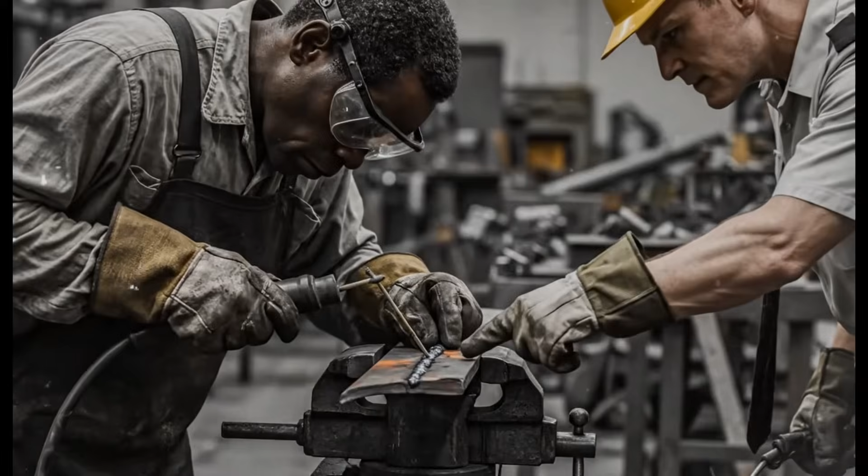The year was 1940. Europe was aflame, liberty teetering on the brink, and America stood at a crossroads, desperately unprepared for the storm gathering on the horizon.

Into this palpable tension stepped William S. Knudsen, a 61-year-old Danish immigrant who had forged his legend from bicycle mechanic to the very pinnacle of American industry, the president of General Motors. He strode into a Pentagon conference room, a civilian amidst a sea of starched uniforms, facing a table of seasoned Army generals who frankly thought he'd lost his mind.

Their faces were etched with skepticism, one even daring a laugh as Knudsen unveiled a promise that sounded like pure fantasy. He would build tanks the same way Detroit built Chevrolets. Not hundreds a year as America's meager 331-unit production in 1940 suggested, but thousands per month, a torrent of armor rolling off assembly lines, run by civilians who'd never even smelled gunpowder. The generals scoffed, clinging to their outdated notion of craftsmanship, of tanks painstakingly forged one by one like medieval swords.

But Knudsen wasn't bluffing. For three decades he had mastered the Ford production philosophy, understanding that complexity shattered into simple, repeatable steps yielded industrial miracles. A tank wasn't some mystical weapon. It was steel, rivets, and engine tracks. If America could churn out 15,000 cars a day, it could build 500 tanks. The math was brutally simple. The execution would be hell on earth.

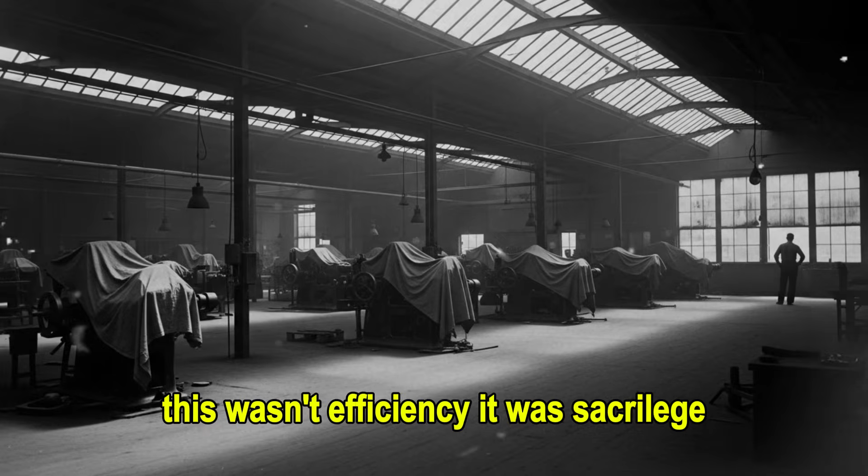The Army's Ordnance Department, steeped in tradition, recoiled. This wasn't efficiency, it was sacrilege. They saw the automotive industry's arrogance as an insult to their decades of meticulous custom manufacturing.

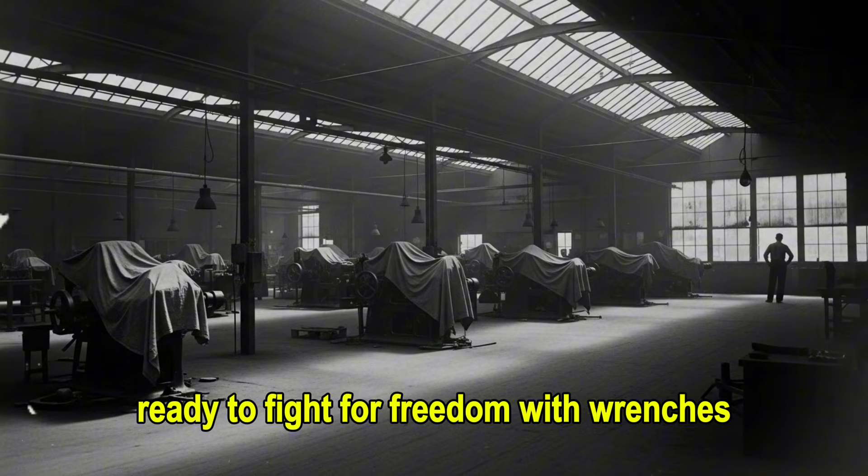Yet Knudsen had heard it all before, back when Henry Ford's assembly lines were deemed barbarism. Now, with the fate of nations hanging by a thread, he was betting America's very survival on that same ruthless industrial logic. He'd already crunched the numbers: millions of square feet of idle factory space, countless unemployed workers ready to fight for freedom with wrenches instead of rifles. The only missing pieces were permission and a tank design simple enough to be mass-produced.

When the British M3 medium tank specifications landed in July 1940, demanding a mere 1,000 units, Knudsen saw his destiny. He quietly instructed his engineers to prepare for 10,000. The stage was set, the impossible dream ignited.

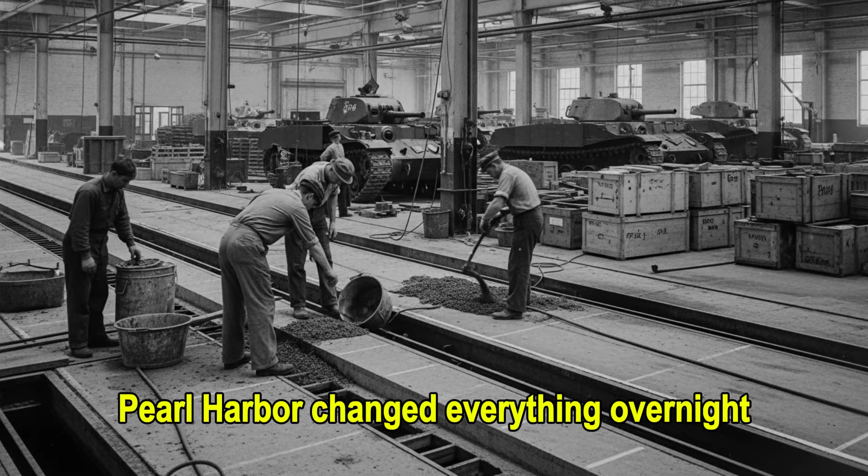On December 8, 1941, Knudsen's theoretical production plans became America's only lifeline. The phone lines at the War Production Board burned hot as factory managers across Michigan, Ohio, and Pennsylvania received identical orders: stop making whatever you're making and start building tanks.

Now the Cadillac plant in Detroit that had been stamping luxury car fenders was suddenly expected to forge tank turrets. Fisher Body, famous for sleek automobile curves, got blueprints for armored hulls. Nobody had done this before. There was no manual titled 'How to Convert Your Buick Factory into an Armory in Three Weeks.' They were inventing the process.

While German panzers rolled across North Africa and Soviet T-34s burned in Ukrainian fields, the chaos at the Chrysler tank arsenal in Warren, Michigan during January 1942 looked less like precision manufacturing and more like controlled panic.

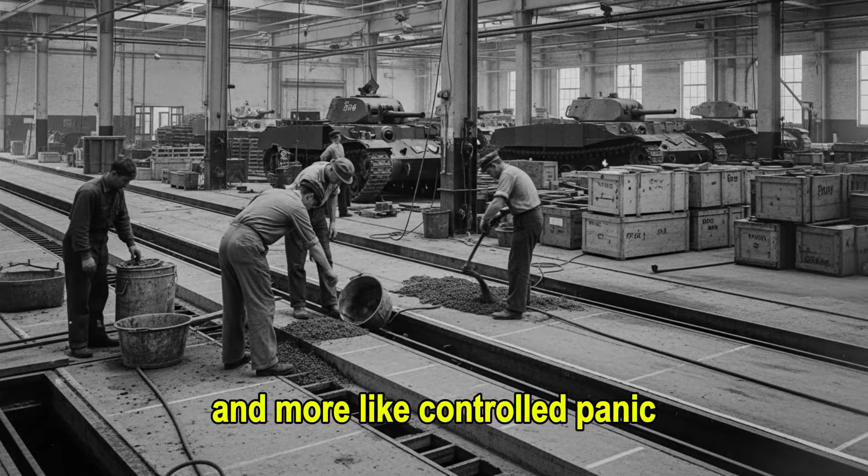Workers showed up to buildings where concrete was still curing on the factory floor. The assembly line existed only as chalk marks on bare ground. Crates of tank components arrived before anyone knew where to store them, so they piled up in parking lots under tarps. Forklifts navigated between construction crews still installing overhead cranes.

The first M3 Lee medium tanks assembled there in April 1942 were basically hand-built, taking two weeks per vehicle, slower than the craftsman approach Knudsen had promised to replace. Engineers stood on the factory floor, literally rewriting blueprints in real time as they discovered tolerances that worked in prototypes failed at scale. Training became the nightmare nobody had anticipated.

You could retool a building in months. But how do you transform a laid-off restaurant cook into someone who could weld armor plate that had to stop armor-piercing rounds?

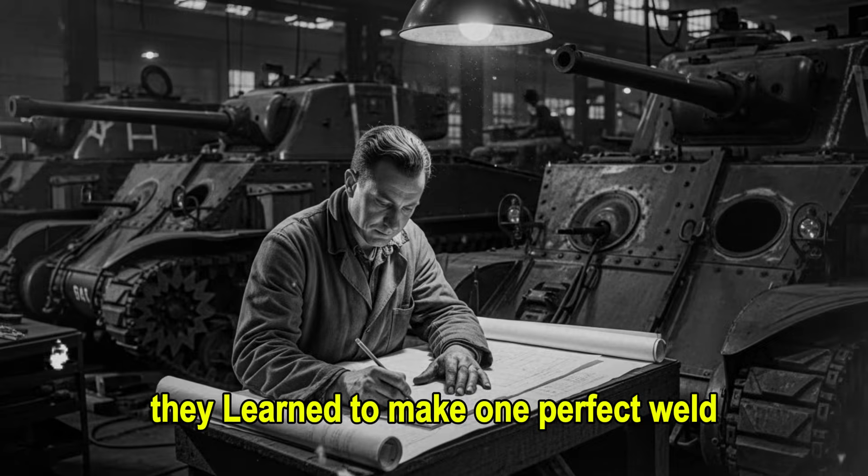The traditional approach of apprenticeships lasting years was impossible. Knudsen's training director, a former Ford efficiency expert named Carl Bailey, created a radical solution. They broke welding into exactly 17 specific techniques needed for tank production. Nothing more. A recruit didn't learn to be a master welder.

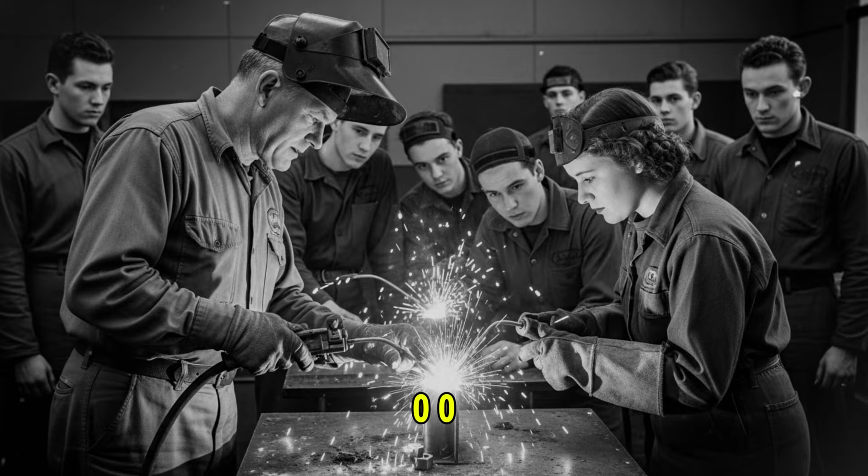They learned to make one perfect weld in one specific location over and over, 10 hours a day. It was the assembly line philosophy applied to human beings. Critics called it dehumanizing. Bailey called it the only way to build 1,000 tanks a month with workers who'd never

held a welding torch 3 weeks earlier. The material bottlenecks nearly strangled production before it started. Armor plate was the critical constraint. Only a handful of American steel mills had the rolling capacity to produce the thick, hardened steel required for tank hulls, and they were already backlogged supplying shipyards.

In February 1942, Knudsen personally visited Bethlehem Steel's plant in Pennsylvania and made an offer the CEO couldn't refuse: government financing for a new plate mill that would triple their output, but only if they delivered the first run to Detroit within 90 days. They did it in 87.

Meanwhile, the shortage forced engineers to get creative. The M3's riveted construction, which traditionalists had insisted on, became a liability. Rivets took time and required pre-drilled holes with precision tolerances. Welding was faster, but required higher skill. The compromise: teach welding faster, simplify the joint designs, and accept a 15% reject rate that quality control would catch.

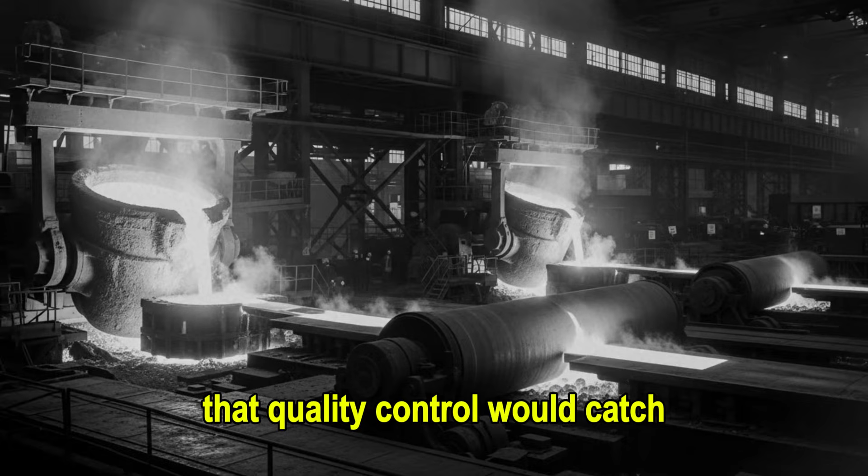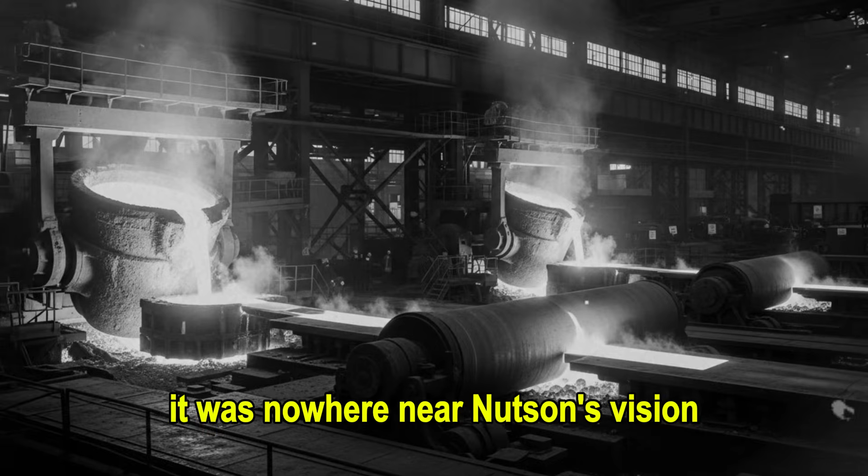By March 1942, the Chrysler line finally started hitting rhythm, producing 4 M3 Lees per day. It was nowhere near Knudsen's vision, but it was movement. Then the Army changed everything again. They wanted the new M4 Sherman instead, a better design, but completely different production requirements.

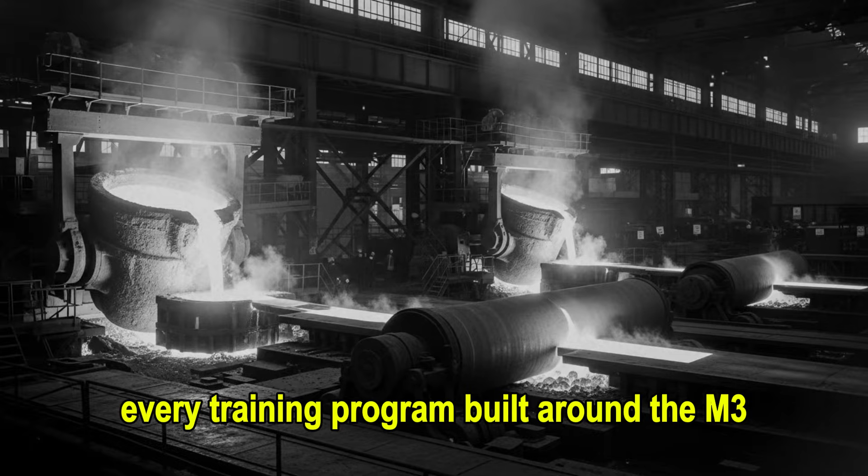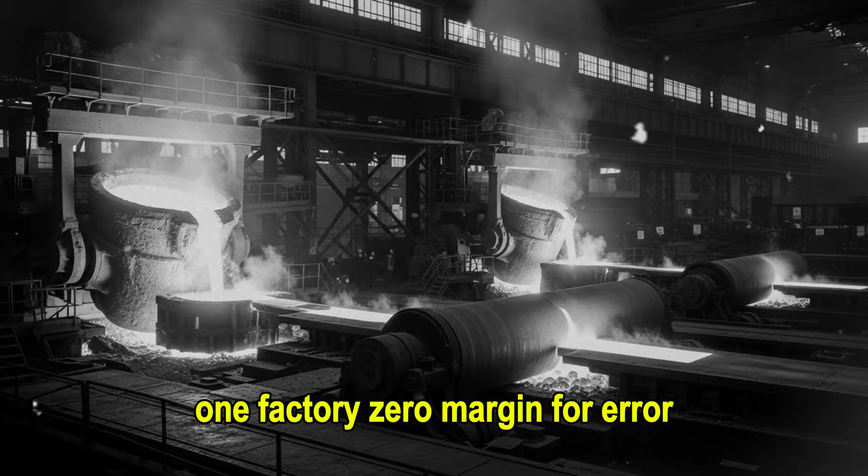Every jig, every tool, every training program built around the M3 became instantly obsolete. Knudsen didn't flinch. He'd been expecting this. War doesn't wait for perfect conditions. You adapt or you lose. The retooling began immediately, even as M3s were still rolling off the line. Two assembly lines, two tank types, one factory, zero margin for error. Welcome to industrial warfare, American style.

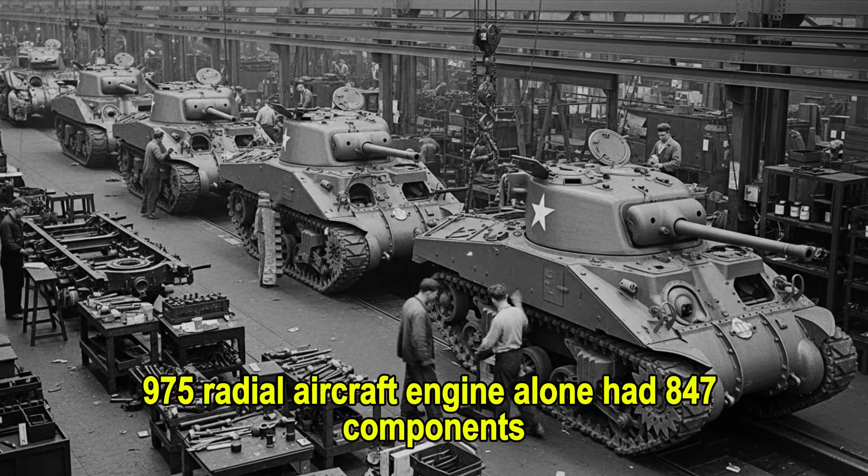The M4 Sherman that arrived on blueprint paper in August 1941 was a 30-ton mechanical nightmare for mass production. It contained roughly 8,000 individual parts, not counting the 5,000 rivets some variants used. The Wright R-975 radial aircraft engine alone had 847 components. The transmission required 23 precision gears machined to tolerances of one thousandth of an inch. The vertical volute suspension system used 48 bogie wheels per tank, each needing individual rubber cushioning.

Army Ordnance had designed it for battlefield superiority, not factory efficiency. Knudsen's engineers took one look at the specs and knew their job was surgical: dissect this beast, simplify everything possible, and make it so straightforward that someone's grandmother could assemble a section without screwing it up.

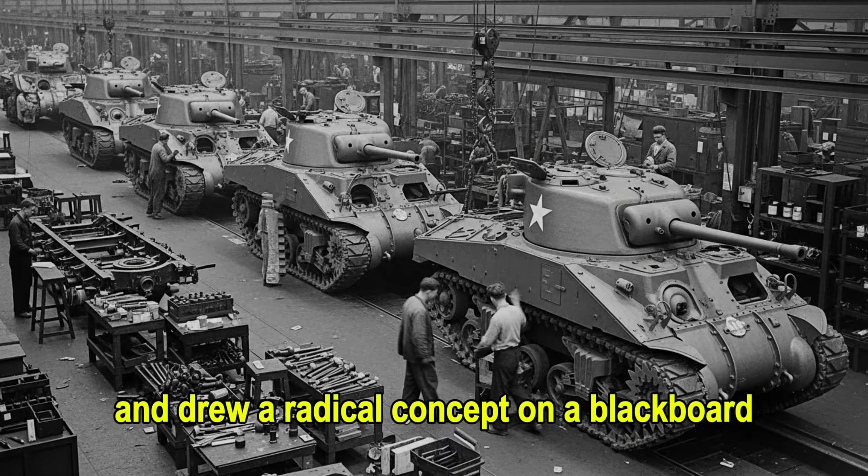The breakthrough came from a GM engineer named John Whittley, who'd spent 20 years designing Cadillac transmissions. He gathered the team in September 1941 and drew a radical concept on a blackboard: treat the Sherman not as one integrated machine, but as 7 major sub-assemblies that could be built simultaneously in different locations, then married together in final assembly—hull, turret, engine, transmission, suspension, electrical, armament. Each sub-assembly would have its own dedicated line feeding into the main artery.

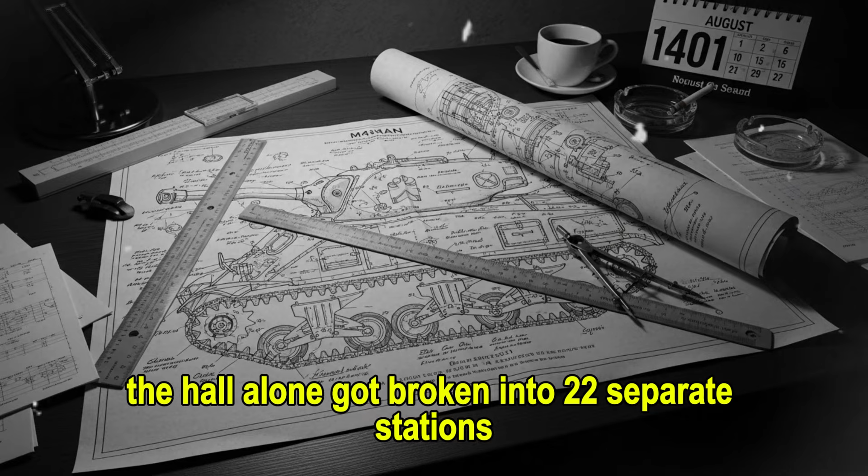The hull alone got broken into 22 separate stations, each performing one specific task. Station 7 did nothing but install the transmission mounting brackets. Station 14 existed solely to weld the bow gunner's hatch. This wasn't tank building anymore. It was choreographed industrial dance with 300 workers, each performing their individual moves in perfect sequence.

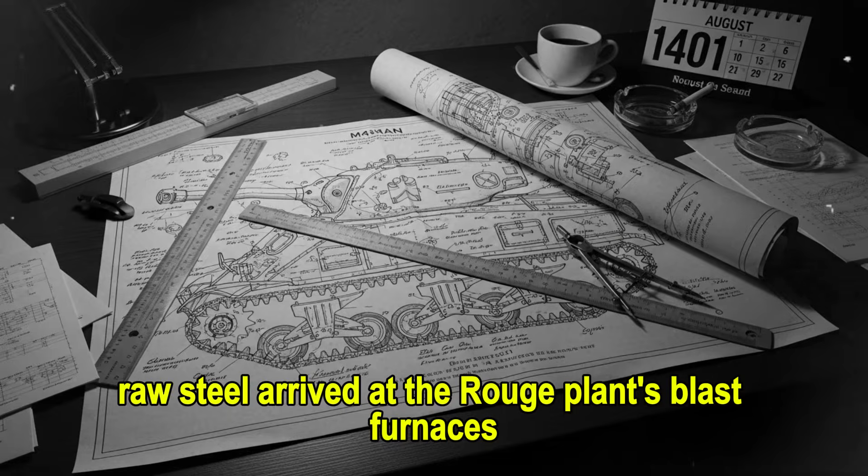Ford's River Rouge plant took the philosophy even further with their version. They vertically integrated everything. Knudsen had watched Henry Ford build a factory where iron ore entered one end and finished cars drove out the other. Now they'd apply that to armor. Raw steel arrived at the Rouge plant's blast furnaces, got rolled into armor plate in their own mill, cut to size in their stamping facility, welded into hulls in Building B, mated with engines from Building C, and completed tanks rolled out the opposite end 48 hours after the steel had been molten.

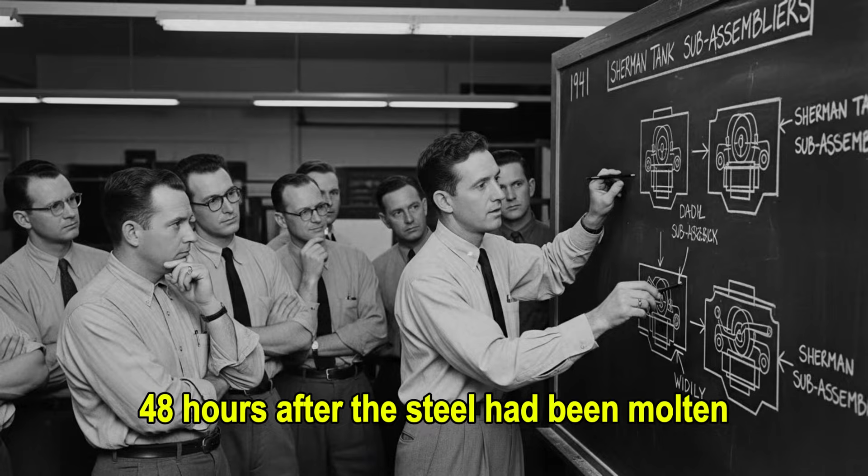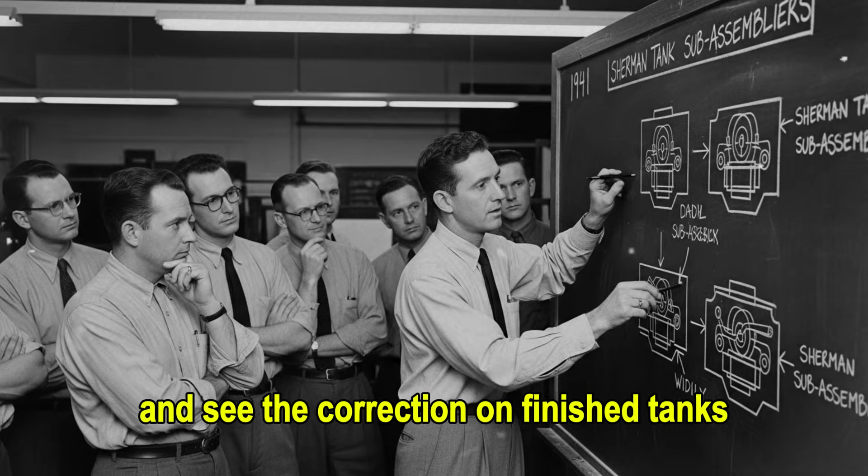Every Sherman component except the main gun was manufactured on site. When a design flaw appeared, they could fix it in the steel mill and see the correction on finished tanks within 2 days instead of waiting weeks for outside suppliers. Speed wasn't just about moving fast. It was about eliminating every delay in the chain.

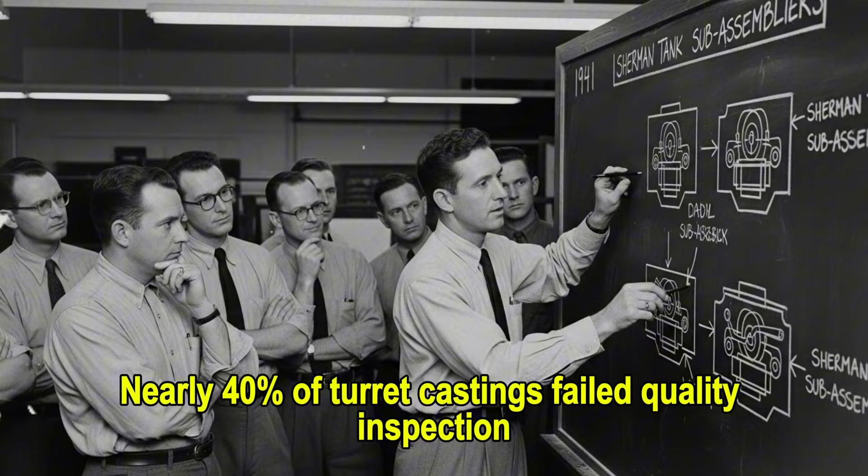The turret presented special problems. Early designs required a massive casting, one single piece of formed steel weighing 3 tons. Only a handful of foundries in America could pour castings that large, and the reject rate was brutal. Nearly 40% of turret castings failed quality inspection because of air pockets or cracking during cooling. Each failure meant remelting tons of steel and a setback.

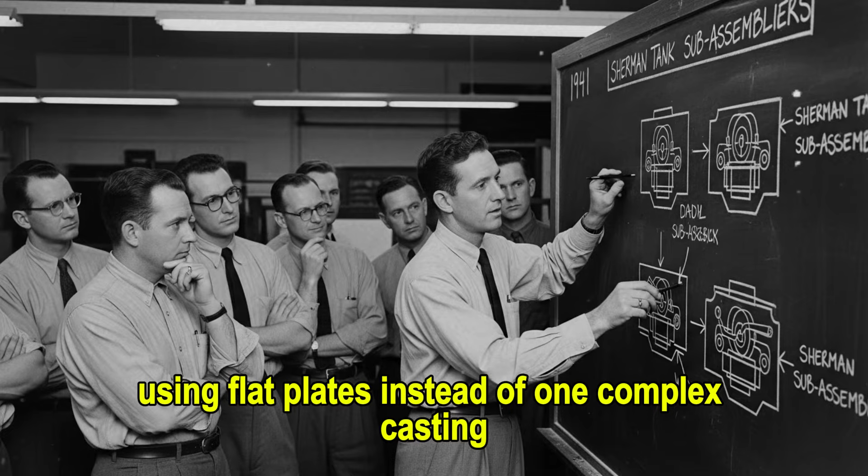Pacific Car and Foundry in Seattle solved it by developing a welded turret design using flat plates instead of one complex casting. It was heavier, less elegant, and ordnance officers hated it on principle, but it worked, and more importantly, production yield jumped to 94%.

Knudsen approved the change immediately over Army objections. Tanks on the battlefield beat perfect tanks on the drawing board. That was his only standard.

Standardization became religious doctrine when multiple factories started producing Shermans: Chrysler, Fisher, Ford, Federal Machine, Pacific Car, Press Steel, Baldwin Locomotive. Each plant initially wanted to make improvements to their design. Chrysler thought their transmission was better. Fisher wanted a different engine mount. Knudsen shut it down brutally.

Every factory would build identical Shermans using identical specifications, identical tooling, identical processes. Parts had to be interchangeable across every tank, regardless of which factory built it. A transmission from Detroit had to drop perfectly into a hull from Chicago.

This wasn't about engineering pride. It was about battlefield logistics. When a Sherman threw a track in North Africa, the repair crew didn't have time to check which factory built it before grabbing replacement parts. Standardization meant a tank damaged on Monday could be fighting again on Tuesday.

Variety meant death. The workers flooding through factory gates in early 1942 looked nothing like the precision machinists Army brass had envisioned building their tanks.

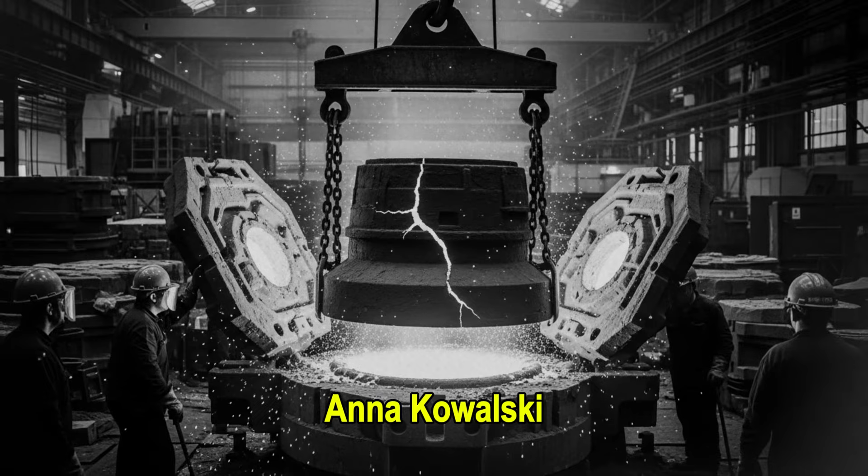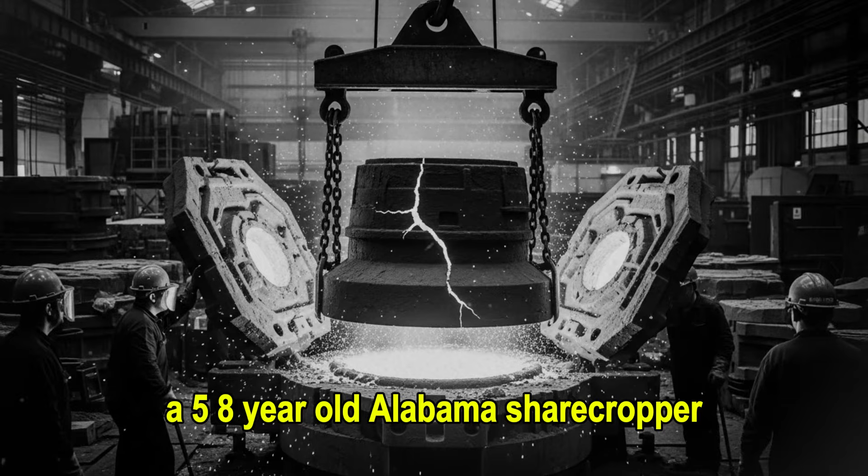Anna Kowalski had been serving coffee at a Detroit diner two weeks before she found herself welding hull plates on the Chrysler line. James Washington, a 58-year-old Alabama sharecropper, had never operated anything more complex than a mule plow. Now he was installing transmission assemblies. Margaret Chen, barely five feet tall, climbed into turret compartments to wire electrical systems in spaces engineers had assumed only small men could access.

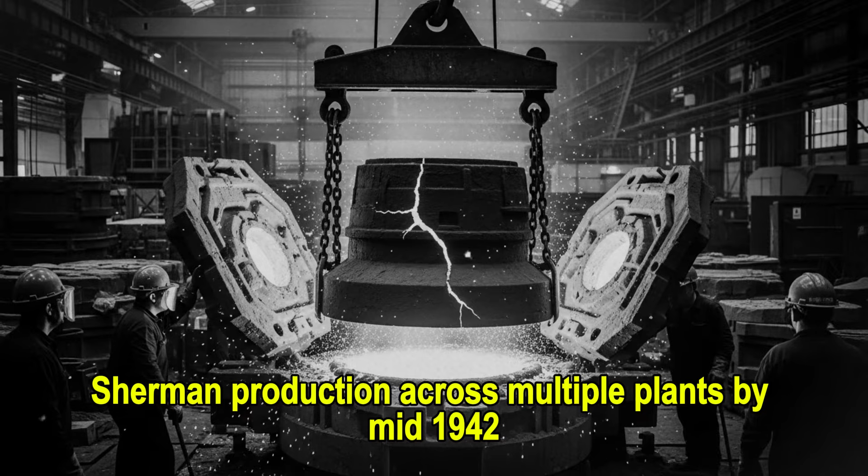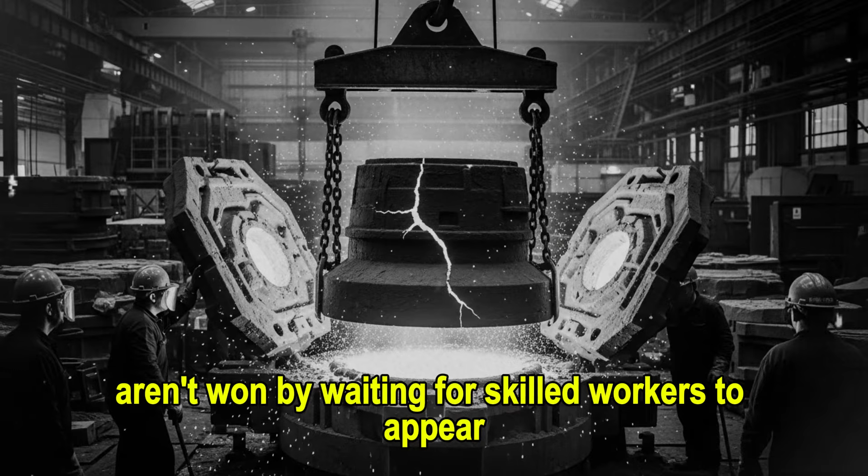Over 4,000 people worked Sherman production across multiple plants by mid-1942, and roughly 65% had zero manufacturing experience. Knudsen had predicted this. Wars aren't won by waiting for skilled workers to appear. You create them from whoever shows up.

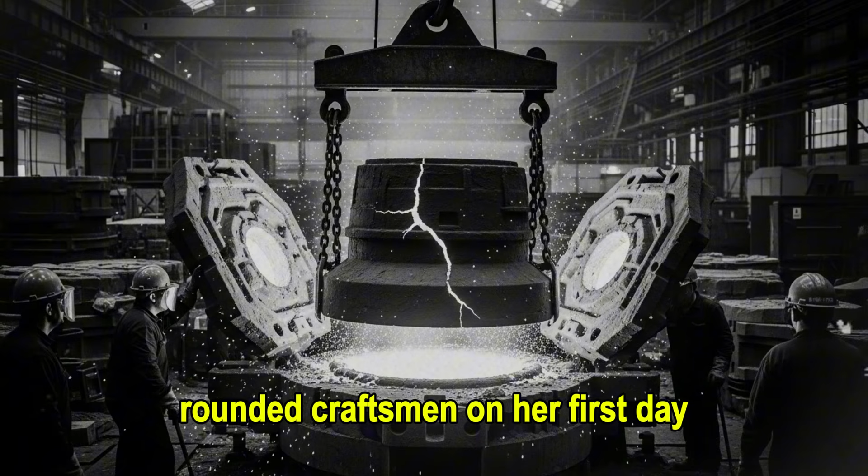The training system Bailey designed was brutally efficient because it abandoned the idea of creating well-rounded craftsmen. On her first day, Anna didn't learn welding theory or metallurgy or proper torch angle for eight different materials. She learned one weld, the vertical seam where hull side meets hull bottom on the M4A3 variant.

That's it. Her instructor, a former pipeline welder from Texas, spent four hours showing her the exact torch distance, precise feed rate, and specific motion pattern. She practiced on scrap metal for another eight hours, until the bead looked identical every single time. By day three, she was on the production line, making that weld for real, dozens per shift.

Station 23 became her entire universe. She got so good at that one specific weld that her reject rate dropped to under 2%, better than workers with 10 years of general welding experience.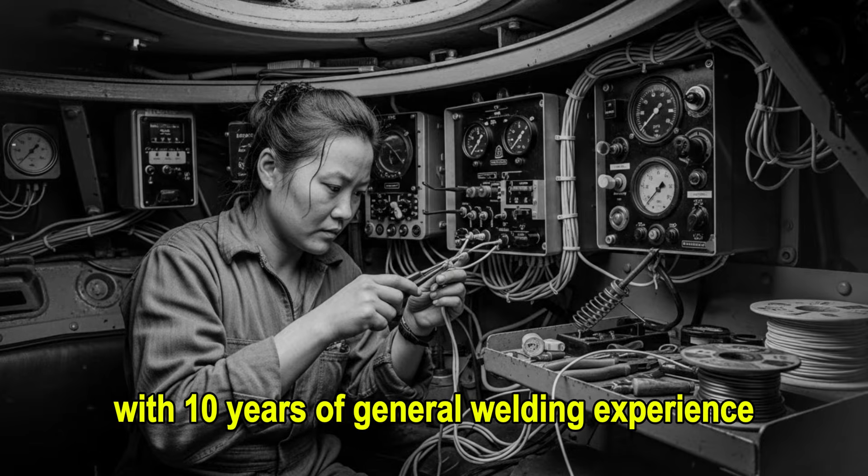The speed of training created quality control nightmares that nearly derailed everything. In March 1942, a batch of 47 Shermans failed Army acceptance tests because internal welds on the ammunition racks were substandard. They'd crack under sustained firing vibration, potentially detonating the tank's own shells and killing the crew.

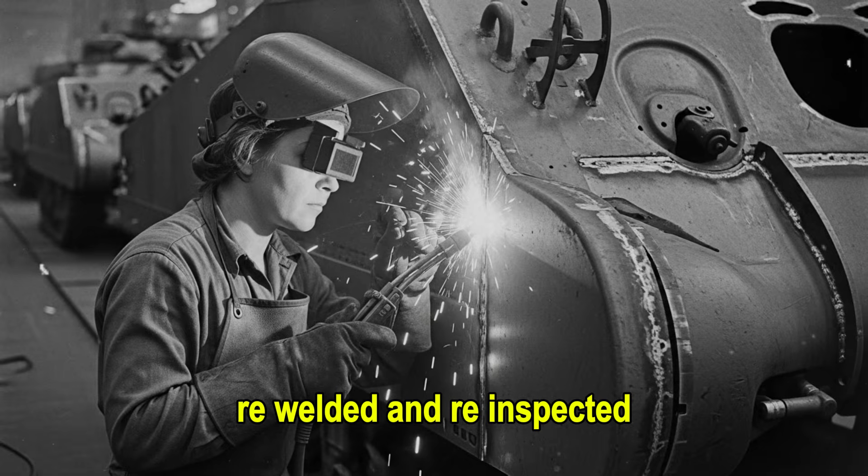Inspectors traced the problem to one training class, where the instructor, overwhelmed by 200 new recruits, had cut corners on teaching proper penetration depth. Those workers had been making bad welds for two weeks before anyone caught it. Every tank they'd touched had to be pulled, disassembled, re-welded, and re-inspected. The delay cost 11 days of production.

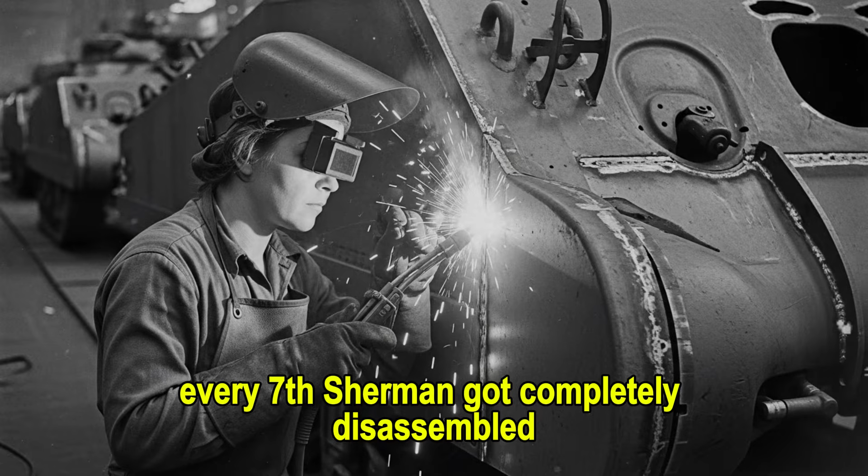Knudsen's response wasn't to slow down training, it was to add inspection stations. Every 7th Sherman got completely disassembled by quality control teams who checked every weld, every bolt, every tolerance. Brutal, wasteful. But it caught problems before tanks reached battlefields.

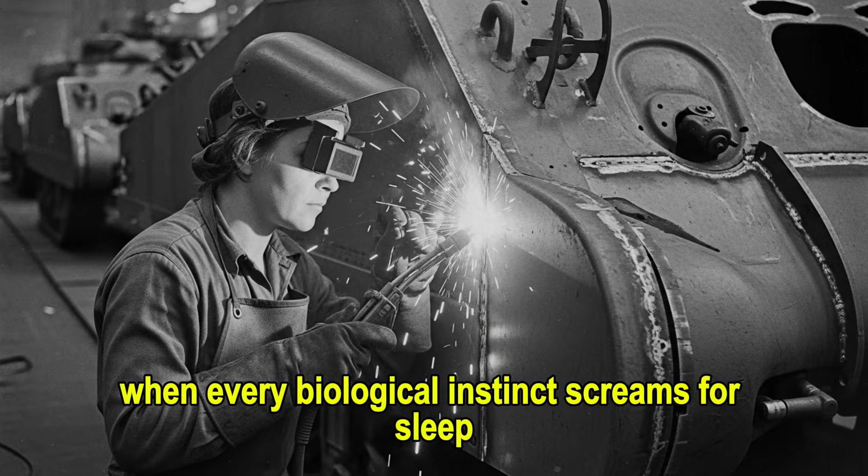The factories ran three shifts, 24 hours, 7 days a week. The night shift, 11 p.m. to 7 a.m., was the hardest. Workers called it the zombie shift because you never adjusted. Human bodies aren't designed to work when every biological instinct screams for sleep. Productivity dropped 15% on night shifts, and injury rates doubled.

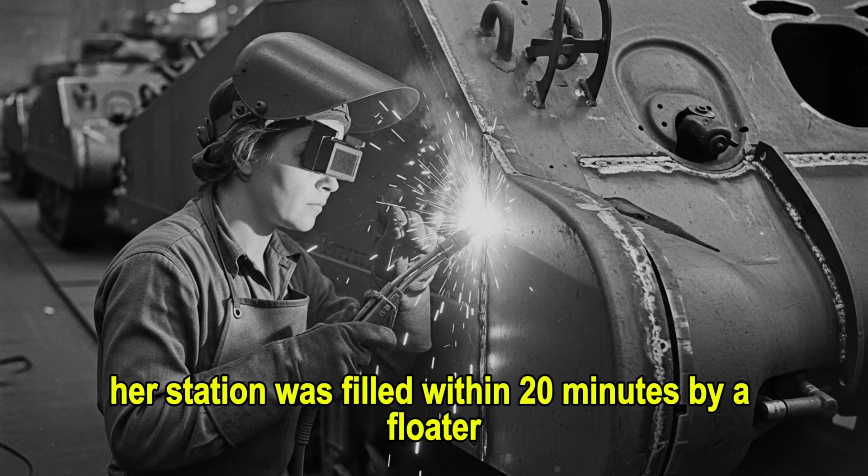Dorothy Martinez, working the turret assembly line at Fisher Body, fell asleep standing up at 3 a.m., and her hand drifted into a moving conveyor belt. She lost two fingers. The factory didn't stop. Her station was filled within 20 minutes by a floater worker who'd been trained for exactly this situation. Dorothy was back on a different station three weeks later because missing fingers didn't disqualify you. Only missing hands did. The cold calculus of wartime production meant everybody that could contribute did contribute.

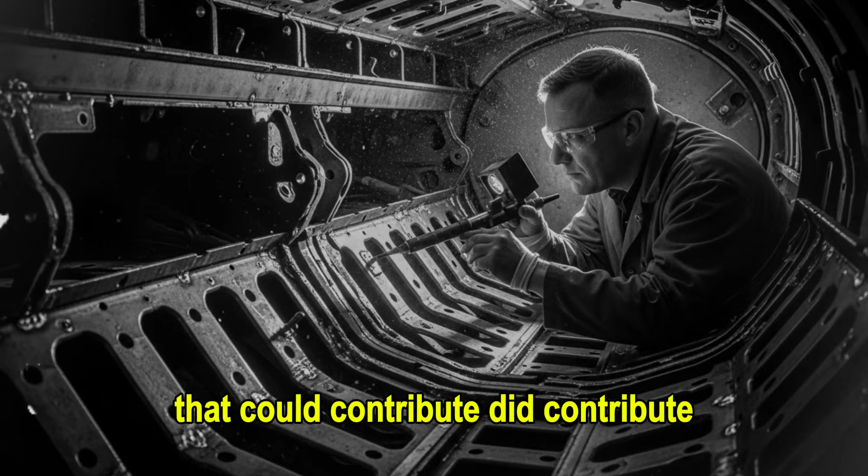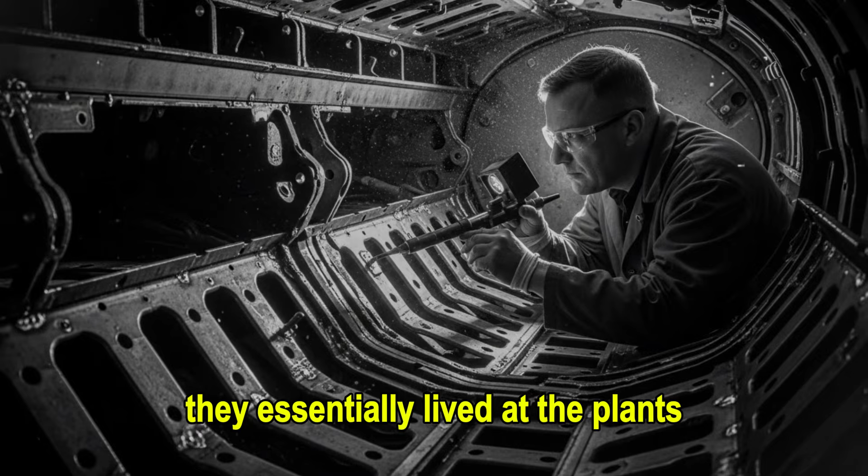The workforce transformed the factories into strange communities. Since many workers had relocated from across America chasing defense jobs, they essentially lived at the plants. Chrysler built on-site dormitories housing 3,000 workers. The cafeteria served 5,000 meals per day across all shifts. A barbershop, medical clinic, and even a small post office operated inside the factory complex. Children attended daycare in converted storage buildings, while mothers welded armor plate 200 feet away.

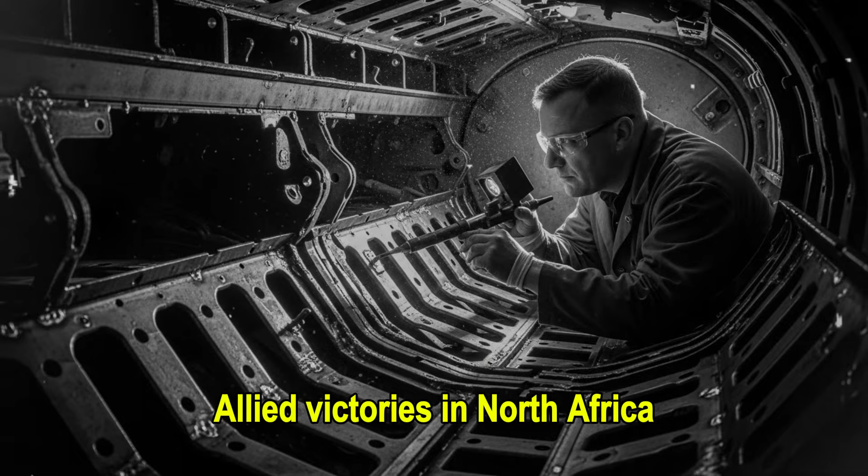The line between civilian life and war production dissolved completely. You ate where you worked, slept near where you worked, and your friends were the people who worked your station. When the PA system announced Allied victories in North Africa during lunch breaks, the cheers echoed off steel rafters, because everyone understood those were their tanks winning those battles.

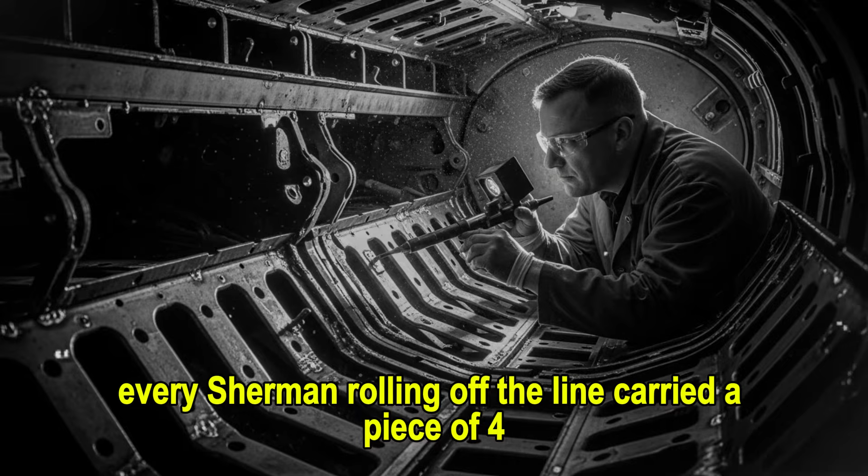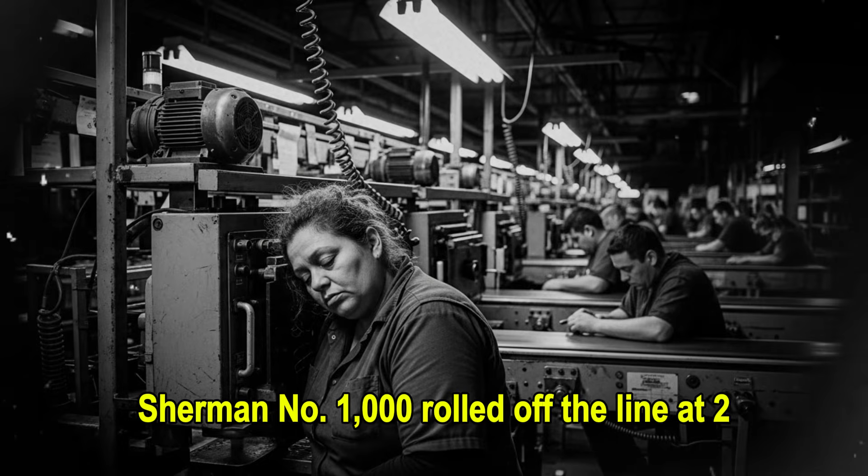Every Sherman rolling off the line carried a piece of 4,000 individual stories, most of which would never be told. April 12, 1943 marked the moment Knudsen's impossible promise became reality. At the Grand Blanc Tank Arsenal, a sprawling complex covering 113 acres of former Michigan farmland, Sherman No. 1000 rolled off the line at 2:47 p.m., exactly 55 minutes after Sherman 999.

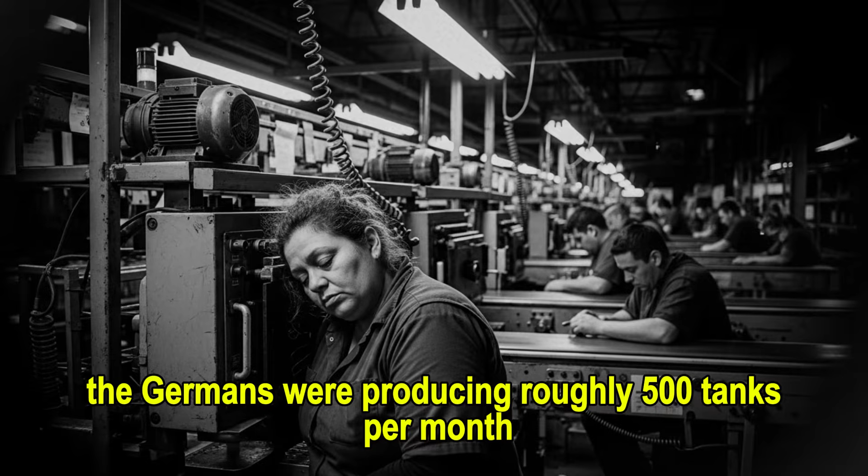The plant had hit the rhythm Knudsen had envisioned 3 years earlier, when generals laughed at him. One complete M4A3 Sherman medium tank, fully assembled, every system tested, ready for combat, emerging from final inspection every 55 to 60 minutes, hour after hour, shift after shift. The Germans were producing roughly 500 tanks per month across their entire industrial capacity. Grand Blanc alone was matching that number, and it wasn't the only Sherman factory.

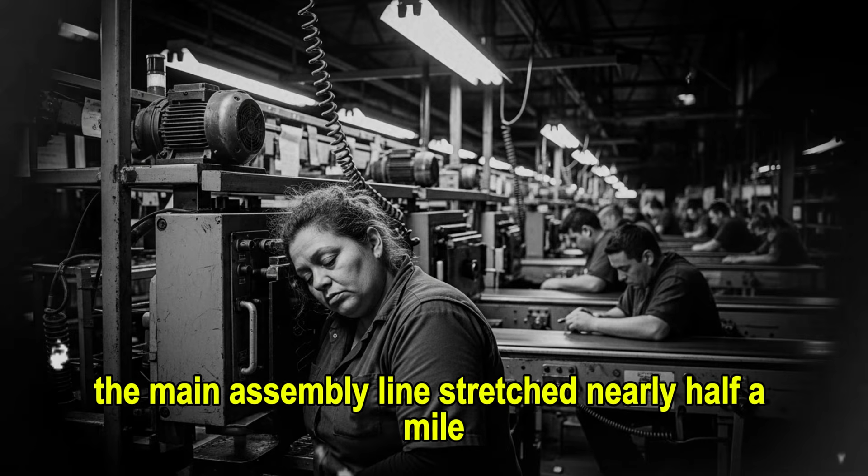Walking the Grand Blanc line during peak production felt like witnessing industrial ballet choreographed by a madman. The main assembly line stretched nearly half a mile. Overhead conveyors carried major components, hulls, turrets, engines, in perfect synchronization. Every 5 feet represented 1 minute of production time. At the line's start, raw welded hulls arrived from the fabrication building, still warm from final welds.

Station 1 workers had 55 seconds to bolt the transmission mounting frame before the hull moved to Station 2. Nobody rushed. Rushing meant mistakes. Instead, every motion was optimized down to the specific hand used to grab each bolt. The workers moved with the mechanical precision of the machines they were assembling, because they'd repeated these identical motions 400 times per shift for months.

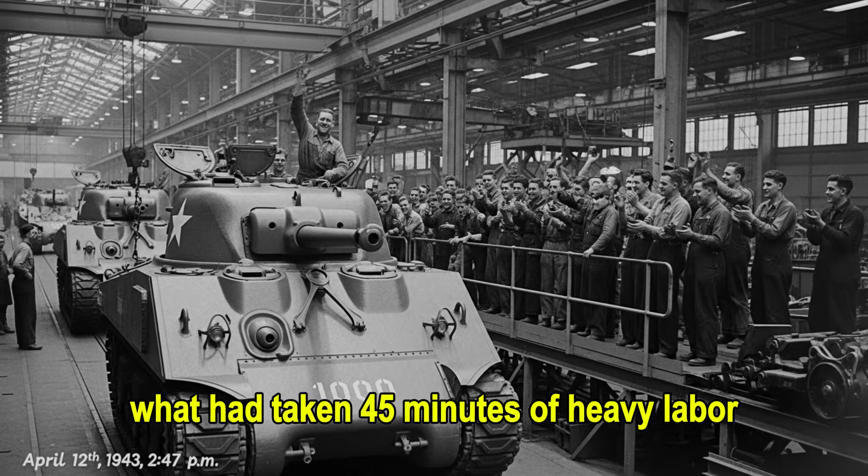The suspended track assembly system became the line's most recognizable innovation. Traditional tank production required workers to manually lift and position the heavy track sections, brutally hard work that slowed everything down and injured backs regularly. Grand Blanc engineers suspended the tracks from ceiling-mounted cranes that moved in sync with the assembly line. As each Sherman progressed, its tracks descended at the exact moment the suspension bogies were ready. Workers guided them into position, and pneumatic tools drove the connecting pins home in 90 seconds flat. What had taken 45 minutes of heavy labor now took less than 2. That single innovation, replicated across 8 workstations, saved nearly 6 hours per tank. Multiply that by 16 tanks per day, and suddenly you're producing an extra battalion of armor every week from pure efficiency gains.

The engine marriage station was where everything either came together perfectly or fell apart spectacularly. The Continental R975 radial engine, weighing 1,100 pounds, had to mate with the transmission, connect to fuel lines, oil lines, coolant lines, electrical harness, and exhaust, all within a 12-minute window. 4 workers surrounded each tank in a precisely choreographed sequence. Worker 1 dropped the engine using an overhead hoist, while Worker 2 guided it onto mounting studs. Worker 3 connected the transmission coupling, while Worker 4 simultaneously ran electrical connections.

They never spoke. Hand signals only. The noise level, hammering, welding, engine testing, metal screeching, made conversation impossible anyway. They'd done this exact sequence so many times that verbal communication became unnecessary. Each worker knew what the others would do next, through pure muscle memory.

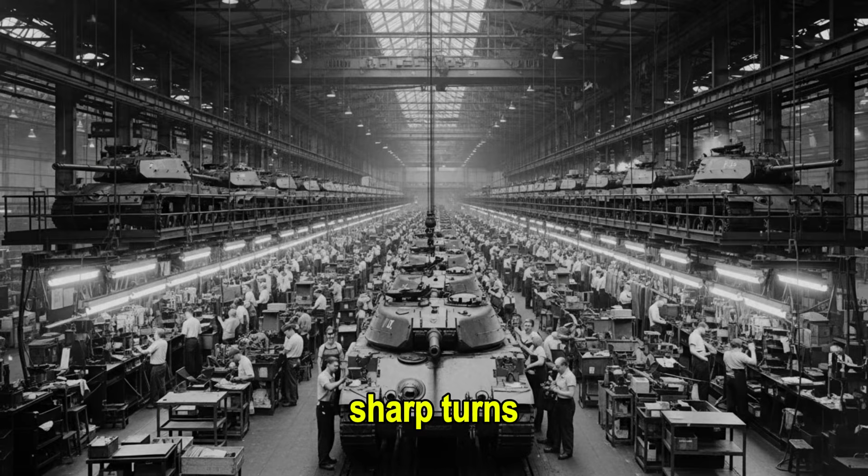Quality control became a religion, because speed without reliability meant nothing. Every tank at Grand Blanc underwent the death run, a 3-mile course on the factory grounds featuring mud pits, steep hills, sharp turns, and obstacles designed to stress every system. Engines ran at full throttle. Transmissions shifted through every gear under load. Suspensions absorbed impacts that simulated battlefield conditions.

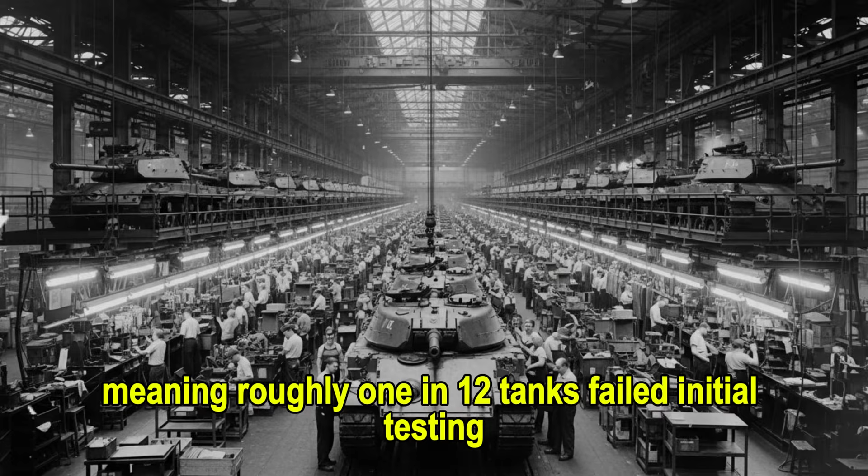If anything failed, an oil leak, transmission grind, track throw, electrical fault, the Sherman was pulled immediately, the defect traced to its source station, and the worker responsible retrained on the spot. The reject rate hovered around 8%, meaning roughly 1 in 12 tanks failed initial testing. But those 8 failures meant the other 92 reached North Africa, Italy, and eventually Normandy with systems proven under stress. Nobody wanted their name associated with a tank that failed in combat because training was inadequate.

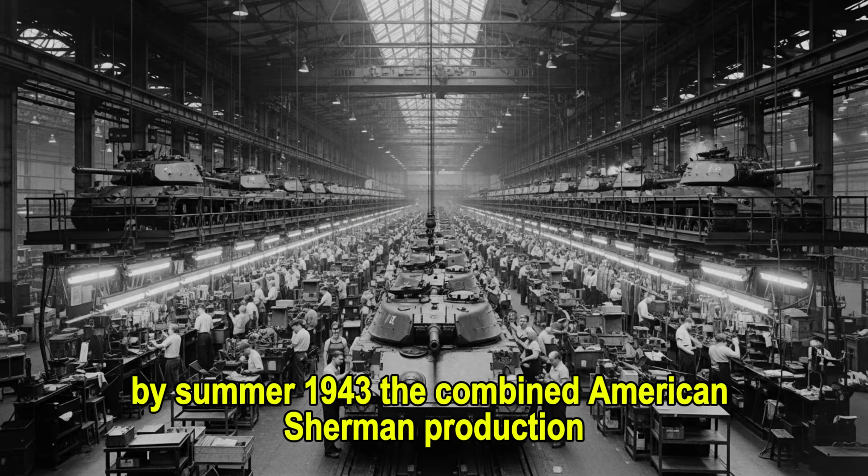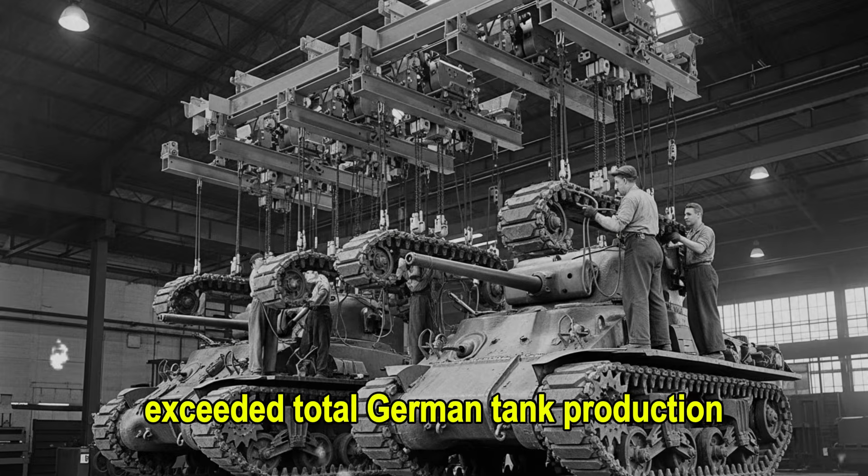By summer 1943, the combined American Sherman production from all plants hit 2,020 tanks in July alone. That single month's output exceeded total German tank production for the entire year of 1941. The assembly line concept had done exactly what Knudsen promised. It turned American industrial capacity into an unstoppable flood of armor.

Soviet officers visiting Detroit factories stood speechless, watching Shermans emerge with metronomic regularity, later reporting to Stalin that American production capability was beyond comprehension. The British, receiving thousands of Shermans through Lend-Lease, rebuilt entire armored divisions around American-made tanks because they simply couldn't match the output. The 60-minute Sherman wasn't just a manufacturing achievement.

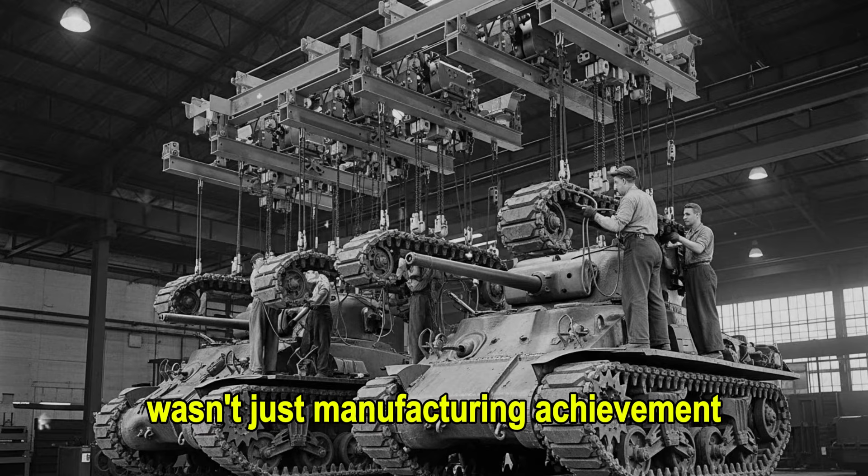It was the moment industrial capacity became a weapon more decisive than any gun. The telegram from North Africa arrived at Knudsen's office on February 18, 1944, and it carried the kind of news that turns assembly lines into graveyards.

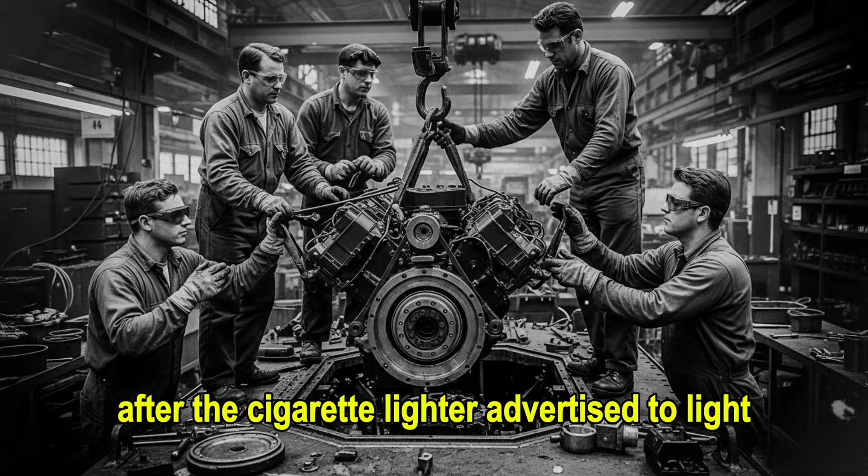American tank crews were reporting catastrophic failures when engaging German Panthers and Tigers. Shermans were burning after single hits. Their thin armor was penetrated easily. Crews were incinerated inside what soldiers grimly called Ronsons, after the cigarette lighter advertised to light on the first strike.

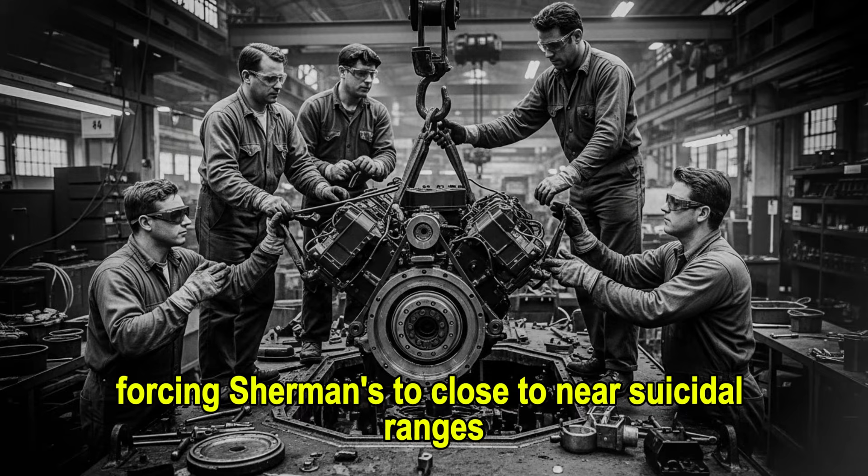The 75mm main gun couldn't penetrate German frontal armor beyond 500 yards, forcing Shermans to close to near-suicidal ranges. Crews were refusing to board tanks. Some units reported desertion rates climbing.

The Army needed solutions yesterday, and shutting down production to redesign wasn't an option. The factories were producing 1,500 Shermans monthly, and Eisenhower needed every single one for the upcoming Normandy invasion.

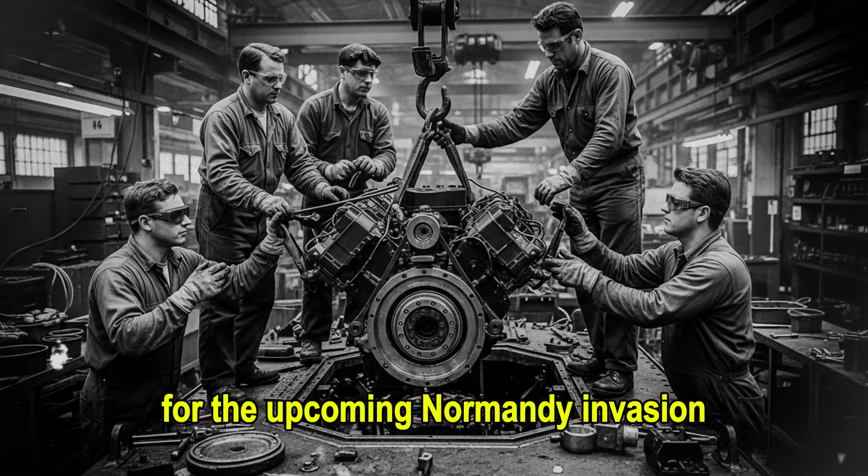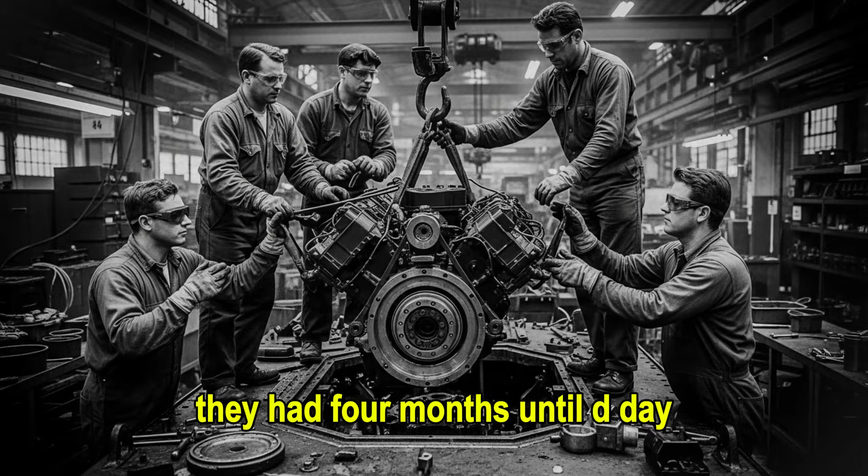The engineering team at Chrysler faced an impossible equation: fix critical vulnerabilities without stopping the line. Complete redesign was off the table. They had 4 months until D-Day, and tanks already in production had to reach Europe combat ready.

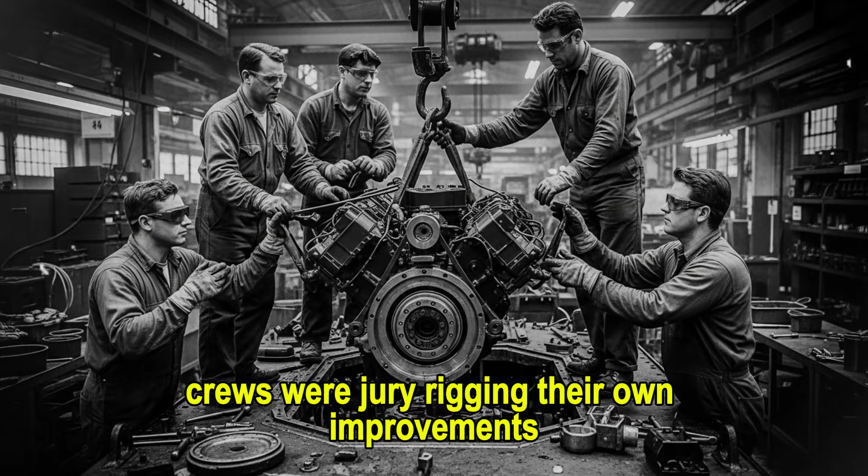The solution came from battlefield reports themselves. Crews were jury-rigging their own improvements, welding spare track sections onto hull fronts for extra armor, sandbagging vulnerable ammunition storage areas, even attaching logs and spare wheels as improvised protection. If soldiers were modifying tanks in combat zones with scraps, maybe the factory could systematize those modifications during production.

The concept of midstream retrofitting was born, changing the product while it moved down the assembly line without disrupting the flow. The ammunition storage redesign happened first because it was the most lethal flaw.

Early Shermans stored 75mm shells vertically along the hull sides, convenient for loaders, but catastrophic when hit. Penetrating rounds would strike ammunition directly, causing instant detonations that blew turrets 30 feet in the air.

In March 1944, engineers redesigned the storage to position shells flat on the hull floor, surrounded by water jackets, wet stowage that would absorb heat and suppress fires. Implementing this change mid-production required adding 3 new stations to the assembly line without slowing the overall flow.

Station 31A now installed the water jacket systems. Station 31B repositioned ammunition racks. Station 31C tested the water circulation.

Tanks entering the line Monday had old storage. Tanks leaving Friday had wet stowage. No production gap. Battlefield survival rates for Shermans with wet stowage jumped from 60% crew survival to 85%.

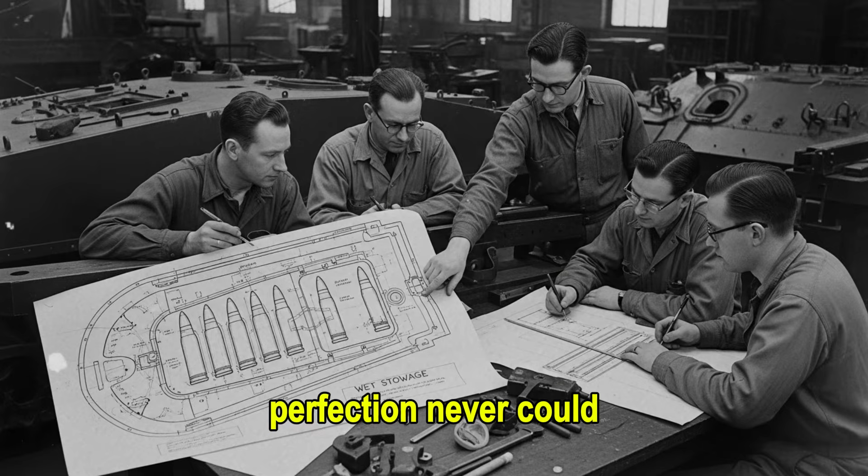A Sherman with wet stowage and applique armor wasn't as good as a Panther in one-on-one combat. But 5 Shermans arriving this month beat 1 perfect tank arriving never. The line kept rolling. The modifications kept coming. And most importantly, the tanks kept reaching the soldiers who needed them.

That was the only metric that mattered in wartime: not perfection, but presence. The final production numbers tell a story that German tank designers, blinded by their pursuit of technical perfection, never wanted to hear.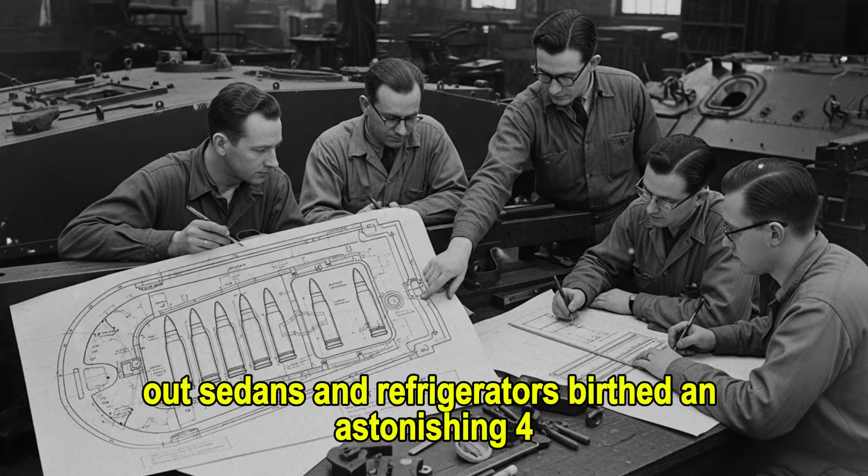Between February 1942 and July 1945, American factories once churning out sedans and refrigerators birthed an astonishing 49,234 Sherman tanks. Read that number slowly. Let it sink in, for it represents the industrial chasm that swallowed Axis ambitions whole.

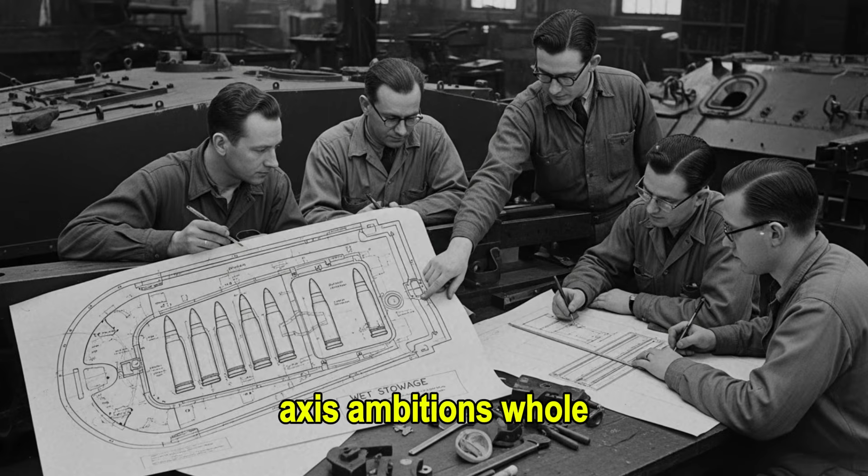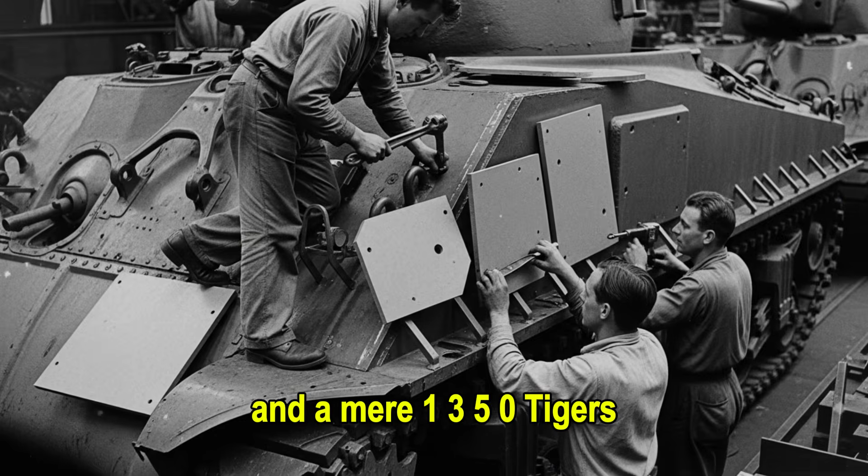Germany, for all its vaunted engineering, managed roughly 6000 Panthers, their superior medium tank, and a mere 1350 Tigers, those feared monsters of the battlefield. On paper, German engineering won every time. On the battlefields of Europe and North Africa, German engineering drowned under an unstoppable, relentless tide of American production. For every Panther destroyed, 3 more Shermans appeared. Math, it turns out, cares little for quality when quantity reaches biblical, overwhelming proportions.

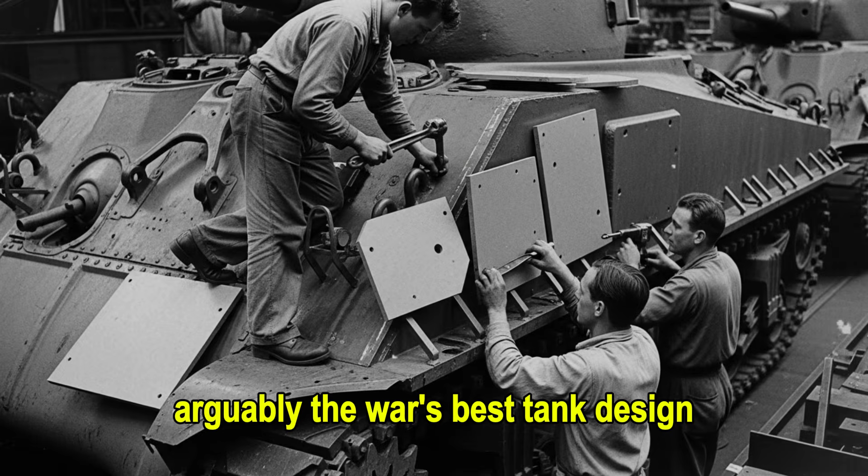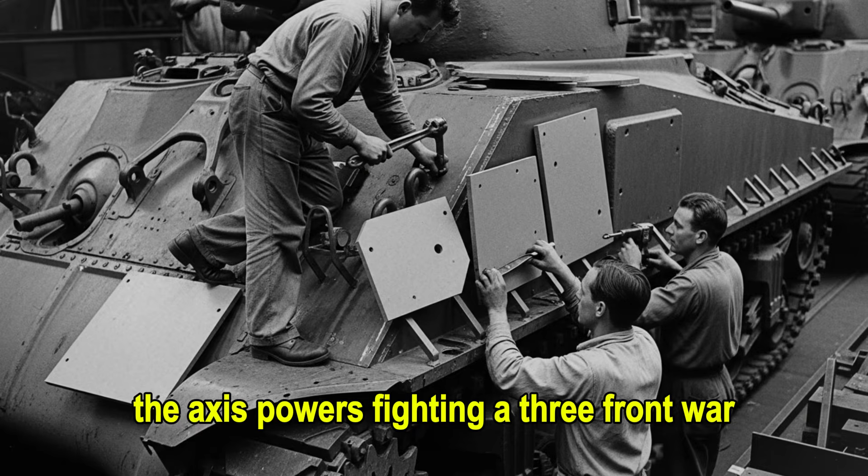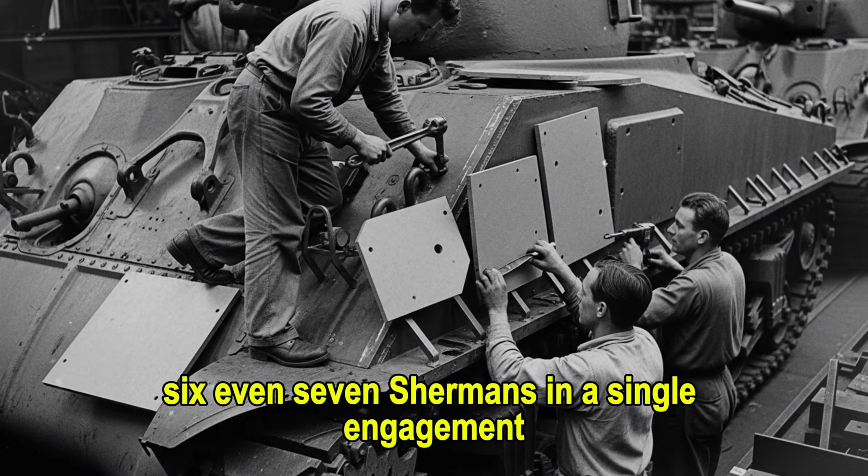5,000. German tank crews reported the psychological horror of destroying 5, 6, even 7 Shermans in a single engagement, feeling victorious only to watch 10 more crest the hill behind them. Tactical superiority became strategically meaningless when the enemy could afford losses you couldn't.

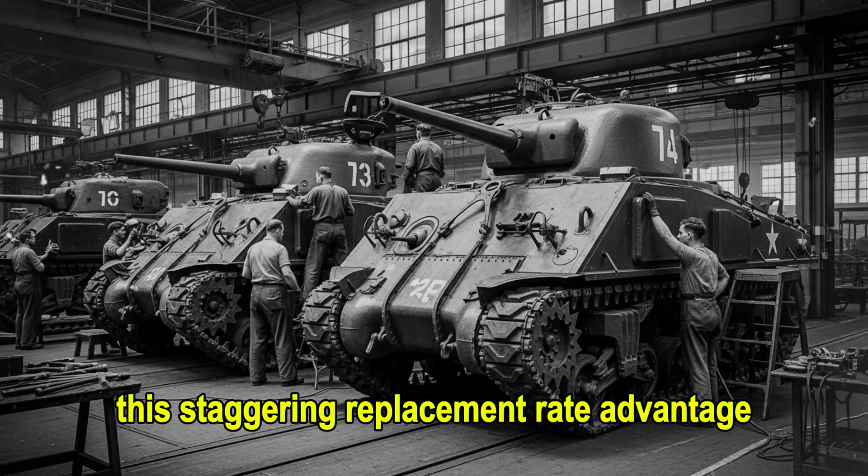Every Sherman brewed up represented maybe 2 hours of American production capacity. Every Panther lost represented 2 weeks of German resources they'd never recover. This staggering replacement rate advantage broke German armor doctrine, completely turning their tactical excellence into a desperate losing battle against

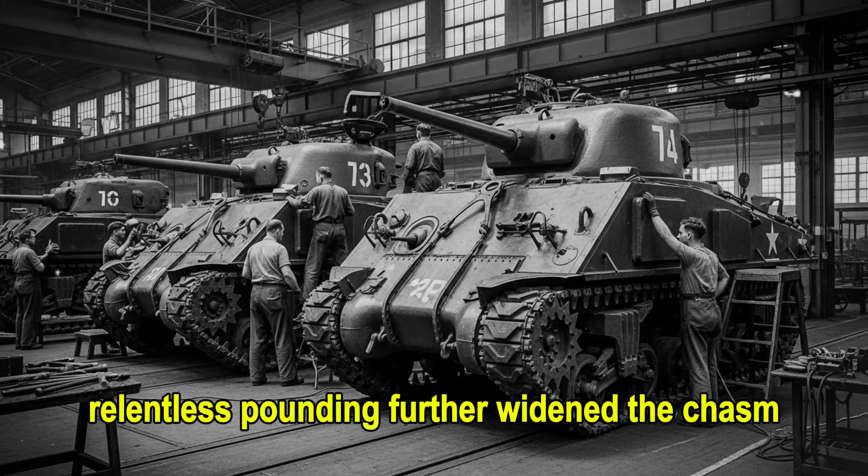industrial inevitability. The strategic bombing campaign's relentless pounding further widened the chasm, crippling German factories, while American production lines, safe and well-fed, ran 3 shifts daily, fueled by unlimited raw materials.

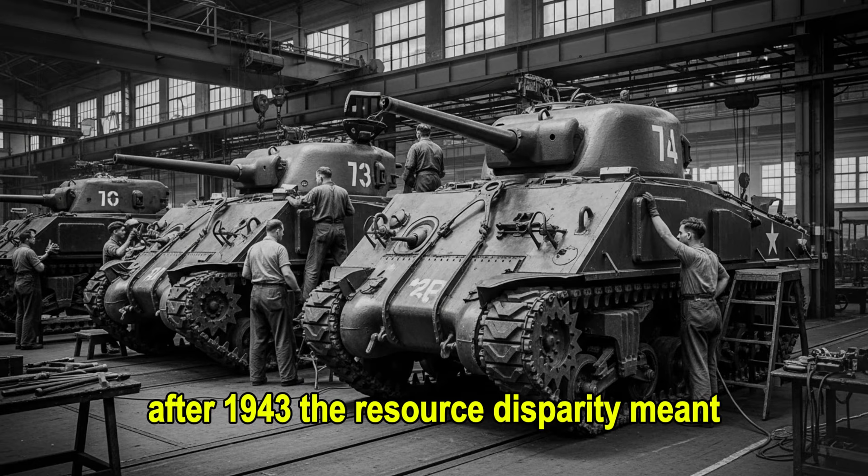Detroit never faced steel shortages. Aluminum was abundant. Rubber flowed from both natural and synthetic sources. After 1943, the resource disparity meant German factories were fighting to merely maintain output, while American factories were optimizing how fast they could build even more.

The sheer logistical tail woven by Sherman production was almost as vital as the tanks themselves. America didn't just build 49,234 tanks. It built the entire support infrastructure, spare parts, ammunition, fuel, maintenance kits, for every single one. German units abandoned repairable Panthers for lack of parts. American maintenance battalions rebuilt damaged Shermans in 72 hours using standardized components that seamlessly interchanged, a true testament to the

assembly line's efficiency. Even the crews themselves became part of this quantity advantage. While Germany suffered from fuel shortages for training, American tank crews learned on mock-ups with unlimited ammunition far from combat, then shipped out with brand new Shermans fresh off the line.

By 1945, the American armored force was a self-sustaining juggernaut where production, training, logistics, and replacement all moved at the same relentless pace. Germany never had a chance against that kind of systematic dominance. The Shermans didn't need to be better. They just needed to keep coming, and they never stopped.

William S. Knudsen died in relative obscurity in 1948, his name largely forgotten by the public he served. No state funeral, no grand memorial. Yet this Danish immigrant, the only person ever to skip every military rank from private to 3-star general, wore the uniform for 3 years without ever firing a shot, doing more to win World War II than most battlefield commanders.

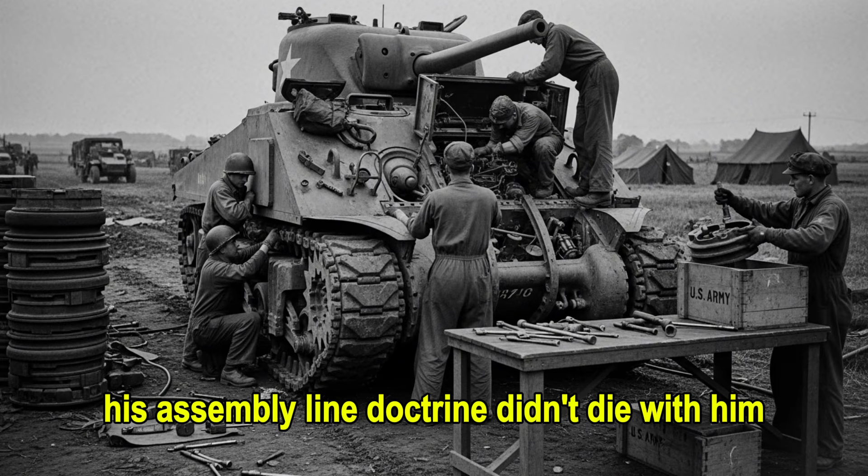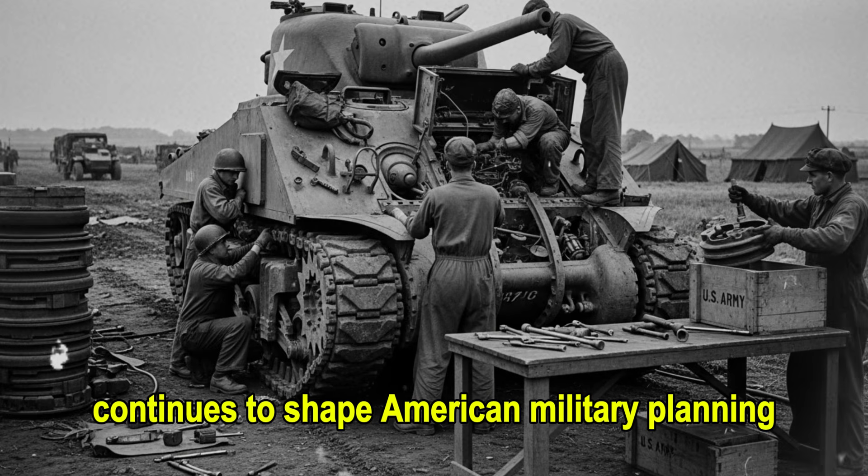Eisenhower himself acknowledged Knudsen's contribution as critical. His assembly line doctrine didn't die with him. It metastasized into every corner of military production, making the arsenal of democracy not poetic language, but official, enduring doctrine. This philosophy, valuing production at scale, continues to shape American military planning from the M1 Abrams tank to emergency vaccine

production. But this doctrine came with a searing cost, one etched in the memories of those who fought. The Sherman crews, particularly in North Africa and Normandy, paid the ultimate price, burning inside tanks that were good enough to produce quickly, but tragically not good enough to protect them adequately against superior German armor.

The institutional bias towards mass production sometimes meant fielding inferior equipment because it could be built faster. Knudsen's genius was recognizing when quantity mattered more than quality, a brutal calculus of war.

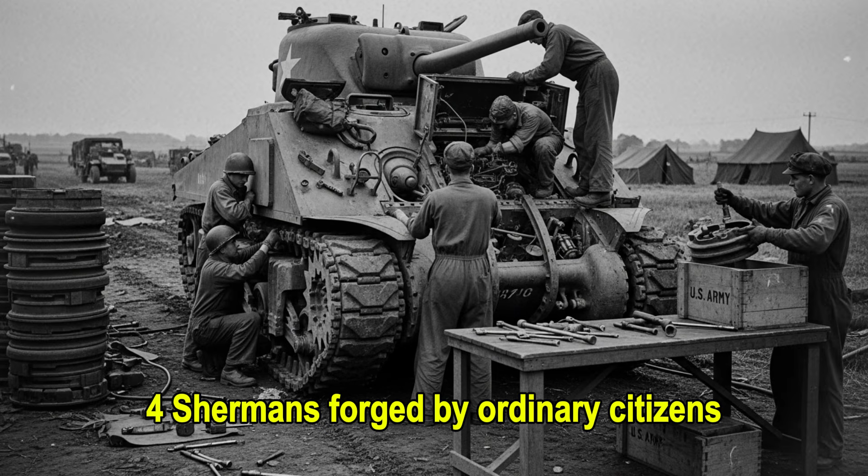The final assessment demands uncomfortable honesty. His assembly line doctrine won World War II. There is no serious debate. The 49,234 Shermans, forged by ordinary citizens and delivered by a system that defied military tradition, crushed Axis armor through sheer overwhelming presence. But those same Shermans were objectively inferior to their German counterparts in armor, firepower, and crew survivability.

American tankers died in greater numbers because the production system prioritized getting adequate tanks to the battlefield now over developing perfect tanks for later. Was it the right choice? History, through the lens of Allied victory, says yes, but the men who burned in those Ronsons might have wanted the conversation to be more complicated.

Knudsen built the machine that won the war. Whether he built the right machine remains a question without a comfortable answer.

What's certain is that no other civilian in American history wielded such immense influence over military victory while remaining virtually unknown. The Danish immigrant who promised the impossible delivered exactly that, then vanished into the footnotes while the world he'd helped save forgot his name. That, perhaps, is the most profoundly American story of the entire war.